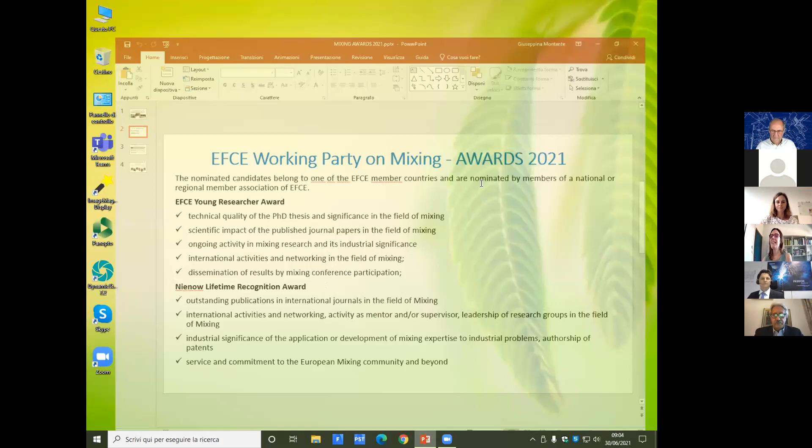As you have seen in the program today, we are presenting the two awards of mixing of our working party, the Young Researcher Award and the Lifetime Recognition Award. Both awards were established in the year 2000 to give recognition for outstanding contribution to mixing research and industrial contribution, both to young researchers at the early stage of their career and senior researchers throughout their career.

We are used to celebrating this event at the gala dinner of the European Mixing Conferences. Today I would like to thank Joelle for organizing this online event, which gives us the opportunity to celebrate with the winners and listen to their presentations. I'm sure that in two years' time we will be able to meet and to add their presence in the pictures that we usually take during the event in person.

Let's take just a few minutes to introduce the criteria that the committee usually considers for selecting the winners among the nominated candidates, who belong to one of the EFCE member countries, as well as the nominators.

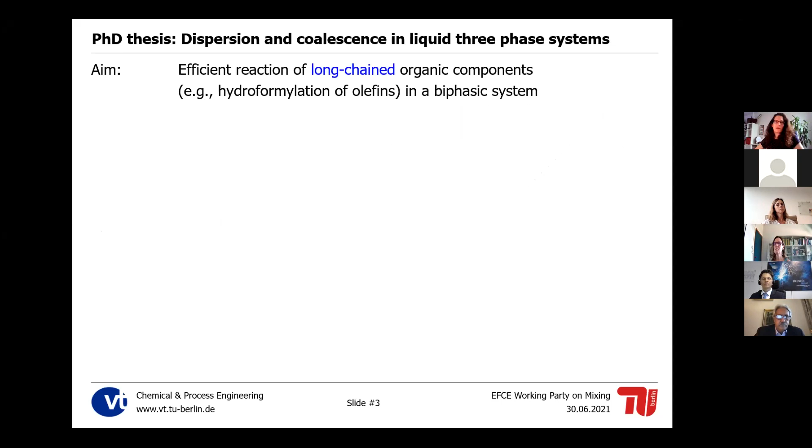The general aim of the whole project was to enable an efficient reaction of long-chained organic components in a biphasic system, for example the hydroformylation of olefins, though other reactions are possible. This should be performed in a continuous process with a reactor and a separator. We want a high interfacial area between the phases in the reactor, then we want to reduce this interfacial area to recycle the second phase, which in our case was water.

This phase also contained the catalyst and the additives in our system, and in the end we hopefully get a very pure organic product phase. So the challenge, which is not really new but also occurred in this context, is the optimization of the reaction and the separation step, so the overall process can work.

One of our solutions was to use non-ionic surfactants as an additive. If you put 8 to 10% of surfactant into your system, you will definitely get a high interfacial area, since you stabilize the emulsions and get smaller droplet sizes. So in the reactor that works perfectly, but it leads to problems with the phase separation.

This means we had to deal with the second process step here. What we did is use the system-specific phase behavior of these water-oil-surfactant systems, because it severely affects the coalescence in these systems.

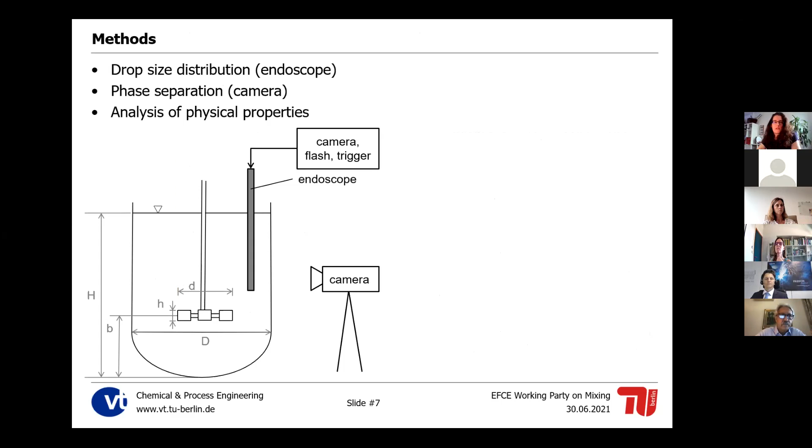The methods I used are, at first look, quite simple. We have a stirred tank, just a batch, and we can analyze the droplet sizes with an endoscope in situ. This is shown here for a very simple oil and water emulsion, a common two-phase system. We use an external camera to determine the phase separation process over time, getting information about the sedimentation and coalescence curve, and also about the dense packed zones that occur. We also analyzed the physical properties, which was actually a lot of work, especially under three-phase conditions, because there were many things we needed to learn just to get the measurements right.

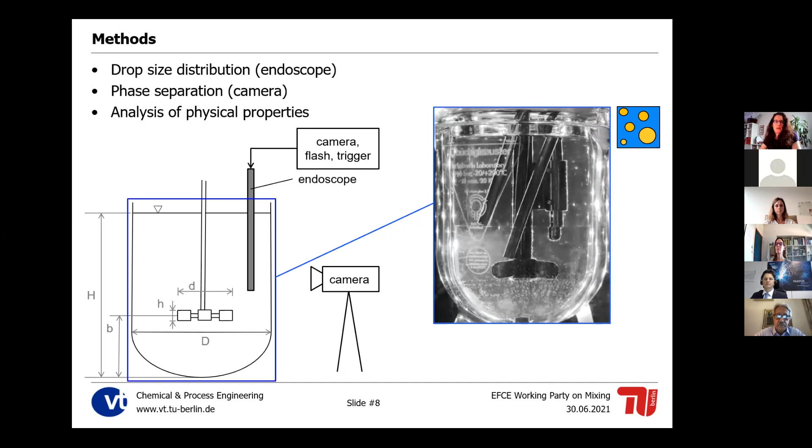When you go from a two-phase to a three-phase system, several things can happen that make it really interesting. Since you have three liquid phases, each of them can become the continuous phase depending on composition and process conditions. Furthermore, you can have either single droplets—actually two droplet forms and two distinct droplet populations—or you can have multiple emulsions, where one phase surrounds droplets of the other phase, which changes the droplet size and the phase separation behavior.

A lot of these effects are quite similar in a way to two-phase systems, but there are many details you need to understand to know what's going on in three-phase systems. Of course, I can't explain them in detail today.

The basic questions we tackled were: when does which emulsion type occur, and why? This was one of the major questions we answered. We also looked at how this affects the drop size distribution, how it affects phase separation, and whether there are ways to predict what will happen, either qualitatively or with models such as population balance equations or phase separation models.

The first question, when does which emulsion occur and why, involves a very complex interplay between the different interfacial tensions in the system, their ratio, the temperature, the solubilities, and the overall process conditions. But we managed to get a very good understanding, and we can now predict well what will happen under which conditions.

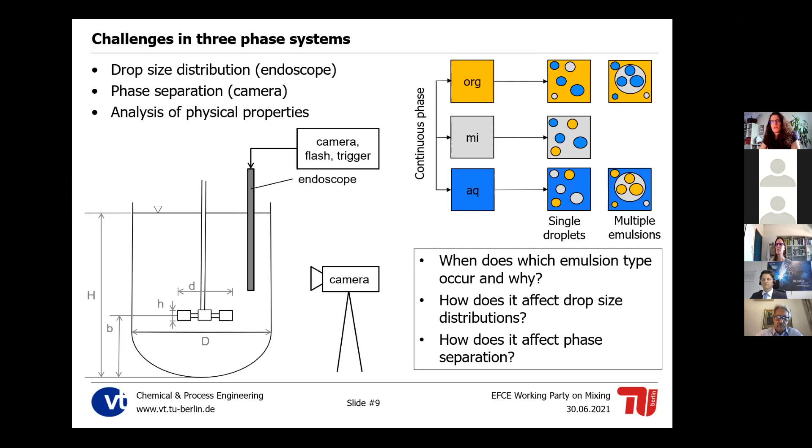I showed today some exemplary results from a model system we used, with a very short surfactant, which was easy to measure in comparison. You can see images of this system here. This is one of the cases where we had a multiple emulsion in an organic continuous phase.

From these images we can either analyze the overall drop size distribution by counting all the droplets we see—shown as the red line—or we can distinguish between, for example, the outer droplets, which are the middle phase droplets, and the inner droplets, which are the aqueous phase. So we get information either about the whole system or about the two distinct droplet populations.

If we change the process parameters a little, it can also happen that we get something like this: an inversion, with a different type of multiple emulsion, but here in an aqueous system. You can also distinguish between the two phases because they have a very different appearance—the inner droplets are quite clear and dark, while the outer droplets are a bit more turbid. You can imagine that the phase separation behavior in these two systems will be very different.

For example, shown schematically here, such an emulsion in the upper example will separate like this. We have very large multiple emulsion droplets compared to all the residual single droplets, which also occur in this system. That means the gray interface, the middle phase, will form quite fast, and the former inner droplets will be expelled into this completely coalesced middle phase. So we get a dense packed zone, and in the end several dense packed zones which overlap. If we change the emulsion type, this behavior will change a lot.

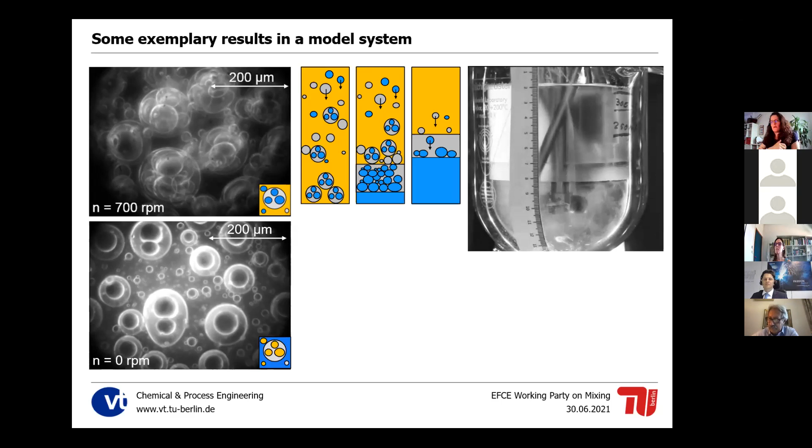What we actually got, and which is one of the main accomplishments I would say, is that these phase separation experiments can be used as key experiments for the whole process development.

This phase separation experiment can be performed in any lab. If you have a double-walled glass beaker, maybe a thermostat, and the specific components, you can just try how the phase separation looks. And with a little bit of knowledge, you can use this experiment to determine the initial type of dispersion that you had.

For that you don't even need the endoscope or the physical properties of the system, because the phase separation will show you what kind of dispersion you had, since it will change the direction and how the phases develop.

If you compare different phase separation experiments, you can also get an idea about the drop sizes, whether they get smaller or larger, and you can even distinguish if there are multiple emulsions in your system or just single droplet populations.

That was one of the things we could use for process development, because you can also perform these experiments in a more complex system, for example with catalysts and also with some educts or side products in it, and they will give you the same information.

During that time, there were already a lot of questions that I started to have which I was not able to answer in my PhD thesis, and some of them I will show here.

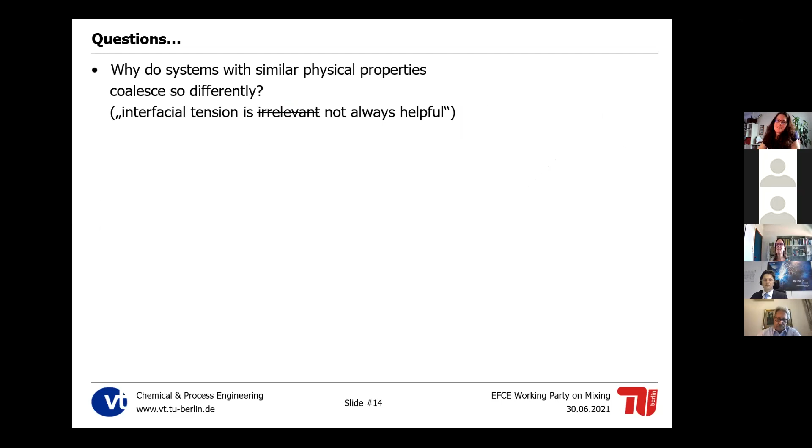One was: why do systems with quite similar properties coalesce so differently? A colleague of mine at another conference recently said that the interfacial tension is irrelevant. He was also working with three-phase systems, and I tended to agree, although I would say maybe the interfacial tension is not always as helpful as you might think. It's not irrelevant, but usually it just doesn't help you a lot.

There are a lot of additional parameters that we need to describe the interface, and therefore the coalescence behavior, such as the mobility of the interface, the rigidity - its resistance against deformation - and the zeta potential. There are a lot of studies trying to investigate this in more detail.

Another thing I started to question is how many experiments are actually reasonable. During my work we also evaluated how population balance equations can be used to predict the drop sizes and the phase separation models. They work in a small process window, and it's very interesting to work with these. But there are sometimes so many experiments that you need to do that, if you know you have a key experiment which basically gives you the result of the phase separation, it puts into question whether you would really do that on a realistic level.

I think this is a question that is also very important in less complex systems, for example in simple two-phase systems with additives that I want to investigate in the future.

Of course we also analyzed the accuracy of these modeling approaches under less complicated conditions than the three-phase systems. I think all of you will know there are a lot of things still to do, and specific models are always good at predicting something, but if you change the wrong parameter they might not give such good results. So this is another question I would like to investigate further in the future.

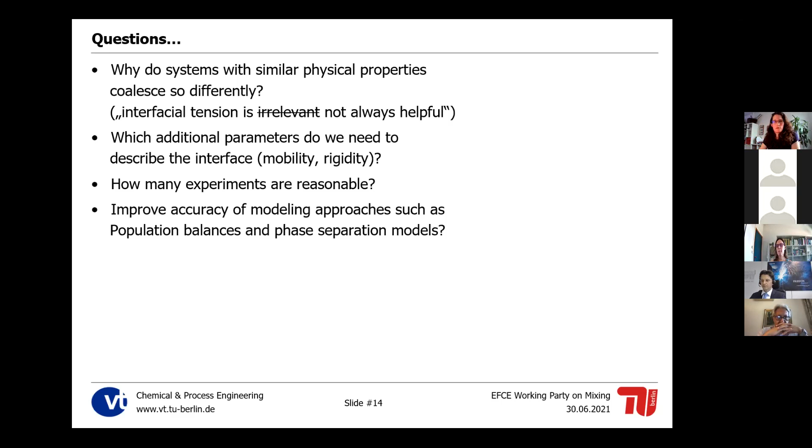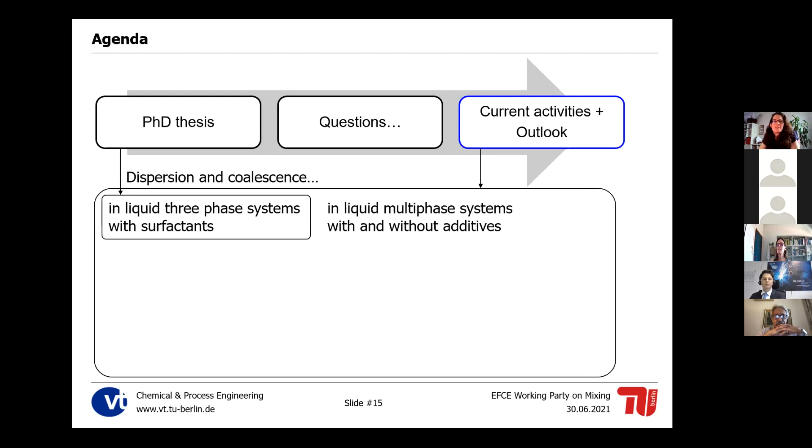This leads me to my current activities, staying in this dispersion and coalescence and stir tank topic, but expanding it to liquid multiphase systems with and without additives. These are basically two-phase systems in many cases, and at our department we have very different measurement techniques, mostly optical, which we use to analyze droplet forms, single particles, and interfaces. I'd like to use this reduction of complexity for model elaboration in the future in very different substance systems.

My current working group consists of a few PhD students and of course a lot of bachelor and master students, and we work on liquid two-phase systems, mainly without additives, with surfactants, with nanoparticles, and with proteins or enzymes as additives. Today I'd like to briefly talk about the nanoparticles, because there are some nice similarities but also differences to the surfactants I presented before.

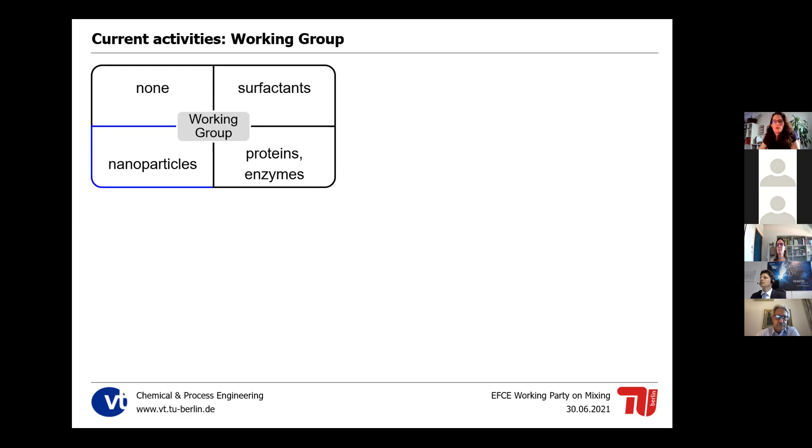Nanoparticles can also go to the liquid-liquid interface and stabilize emulsions against coalescence. But they don't do so by reducing the interfacial tension, which usually stays constant or nearly constant; instead they form a mechanical barrier that prevents deformation of the droplets and thereby coalescence. Nanoparticles also come in very different sizes and shapes and with different surface modifications, making them very interesting additives at interfaces.

If we add nanoparticles to our systems, for example up to 1 weight percent in relation to the dispersed phase, we see a huge impact on the coalescence behavior—coalescence is inhibited by the presence of nanoparticles. One of the current projects is to use population balance equations, such as the model by Coulaloglou and Tavlarides that many of you will know, and to modify it to account for the presence of nanoparticles in these systems.

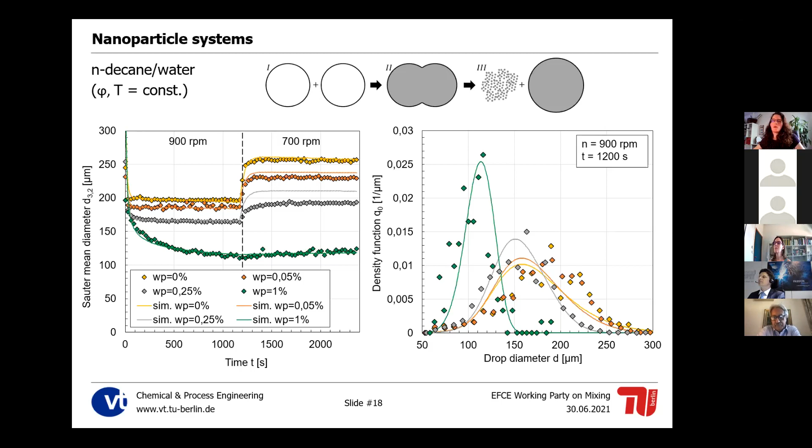That was just one basic idea, and we modified the Coulaloglou and Tavlarides model; the results are shown as the lines in the diagram, giving a quite good description, not perfect yet, of both the Sauter mean diameters in steady state and the step experiments. Importantly, we try not only to fit the Sauter mean diameters but also the whole distribution of the system. The experimental distributions and modeling results are shown here, and although the experiments scatter a bit, we get a good description of how the distribution width broadens and shifts toward larger diameters—quite promising.

Of course there are a lot of things we can still improve. For example, apart from the coverage, we also want to introduce a physical parameter of interfacial rigidity. This means measuring the dilatational viscoelasticity of the interface in the tensiometer as a function of the coverage or particle mass fraction. This can give information about multi-layers that occur and can maybe in the future be introduced into the model to optimize it further.

And of course we have a hundred other ideas—for example, nanoparticles change the viscosity of the phase they're in, making it shear thinning, sometimes even viscoelastic. So there are a lot of things we're currently working on. For everyone interested in details, I'll also be at the ECCE conference in September, where we'll present a bit more about the model we developed here.

So with that, I would come to a brief outlook. I already showed you what I'm planning to do during the next years in my research. And I also started what I call a little side project. Little side projects can sometimes take a lot of time too.

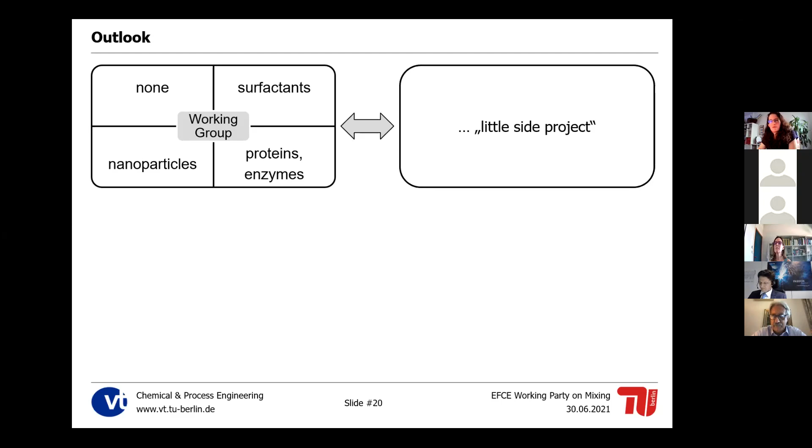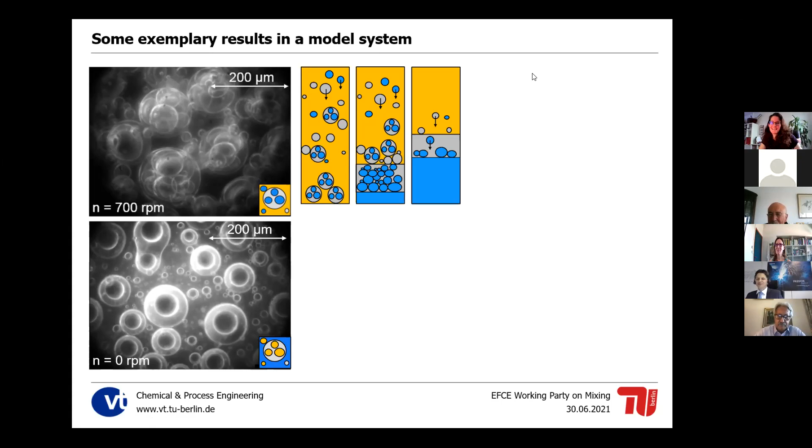Lena, thank you, it was really a pleasure having this talk, and I could imagine with all the questions we could talk for hours. We need to watch the timing, and thank you again for this wonderful talk.

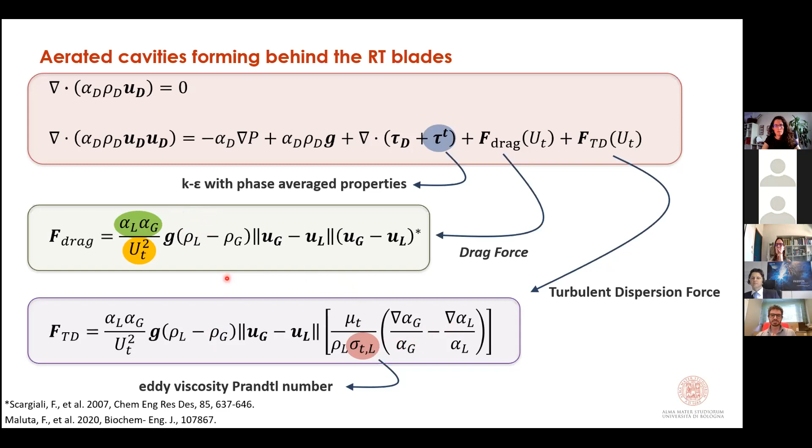We studied the interaction of the interface forces, and we concluded that both the continuous and the dispersed volume fractions must be included in the formulation of the forces, and actually their balance allows the formation of aerated cavities behind the blades of the impeller.

As we were saying, the interface forces depend only on the bubble terminal velocity, and the Grace model was adopted since it can describe the motion of spherical and ellipsoidal bubbles. A single terminal velocity was adopted, meaning that a monodistributed bubble size was assumed.

Assuming a single bubble diameter, of course, is not the only viable approach. Many research groups successfully adopted the population balance to get the bubble size distribution, in fact. So we adopted a single bubble diameter to cut down computational costs, allowing the adoption of the proposed model to industrial size fermenters.

Moreover, we have to say that few studies address coupling between CFD and population balance equation in stirred tanks at high gas flow rates, and especially, let me stress this, when segregation occurs, so when we have the cavities.

Okay, the first set of results that I'm showing concerns the prediction of aerated cavities behind the impeller blades. On the left side here, you can see the results of the tank operating in the conditions shown at the top of the slide.

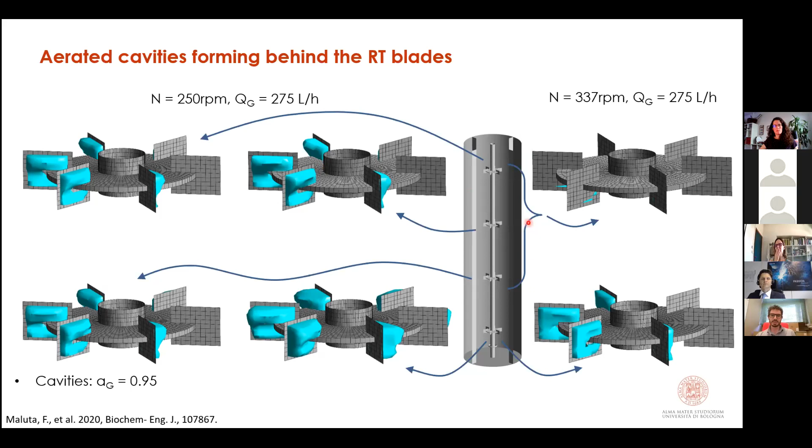Once we managed to predict the aerated cavities, we used the single impeller stirred tank to quantitatively validate the results. Adopting the correlations developed by the group of John Smith, we identified 4 conditions in which vortex clinging and small 3-3 cavities were expected. As you can see here from the pictures, in cases 1 and 2, the clinging cavities are predicted, as expected from the correlation.

The color map indicates the gas volume fraction, and once again, only the cells with a gas volume fraction higher than 0.95 are displayed here. The other 2 cases, case 3 and 4, show the small 3-3 cavities, and it is evident there is an alternating pattern between clinging and large cavities.

Afterwards, we compared the area of the cavities as obtained from the simulations and from experimental data previously collected in our research group. To determine the gas-liquid interface, 2 thresholds were adopted: the lowest corresponding to a gas volume fraction of 0.95 and the highest being 0.99. The numerical results are in very good agreement with the experiment.

The correct prediction of the aerated cavity size and shape is important since the power drawn by the impeller decreases as the accumulation of gas behind the blades increases.

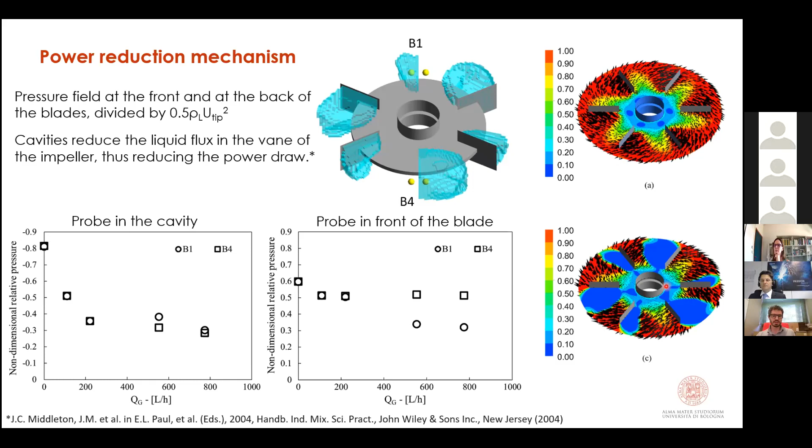In particular, gas is almost homogeneously dispersed in a complete recirculation regime. In the loading regime, the gas phase is distributed mostly above the plane of the impeller, and in the flooding regime, it is evident that the impeller fails in distributing the lighter phase, which travels almost undisturbed from the sparger to the upper surface.

The mean age theory developed by Liu and Tilton was extended to 2-phase systems, and the analysis was performed in the 4 different flow regimes presented before.

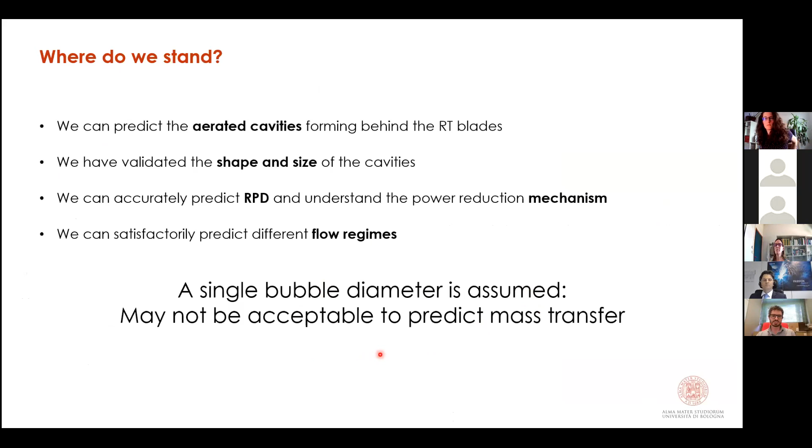The results I've just presented are obtained with a single bubble diameter. With this simplified approach, we managed to predict many features of aerated stirred tanks, but the main drawback is that it may not be acceptable to predict the interface mass transfer, and in particular the specific interfacial area. In fact, in stirred tanks, the interface mass flux is commonly modeled with this expression, where N is the molar flux.

According to the widely used Eddy-Cell model by Lamont and Scott, this expression is used to model the liquid side mass transfer coefficient. KL depends on the local turbulent dissipation rate, and therefore we can predict it since we've seen that the average epsilon field produces power numbers close to the experimental values.

The next term to model to obtain the interface mass flux is the specific interfacial area. So far, in the context of the 2-fluid model, we used a simplified expression to obtain it at a high gas volume fraction and where there is segregation of the 2 phases.

A more realistic strategy would require modeling the bubble size distribution with a population balance approach, as already done by other research groups for dispersed gas liquid systems. We are currently investigating this path, and in a few slides I'll show some of the open issues we are facing. The last term to model to obtain the interface mass flux is the driving force of the process.

Once the turbulent 2-phase flow field is satisfactorily predicted, the species distribution inside each phase is governed by a scalar transport equation. One way to validate the transport dynamics is to compare the numerical and experimental mixing times following the injection of a tracer, and such experiments are currently underway in our labs.

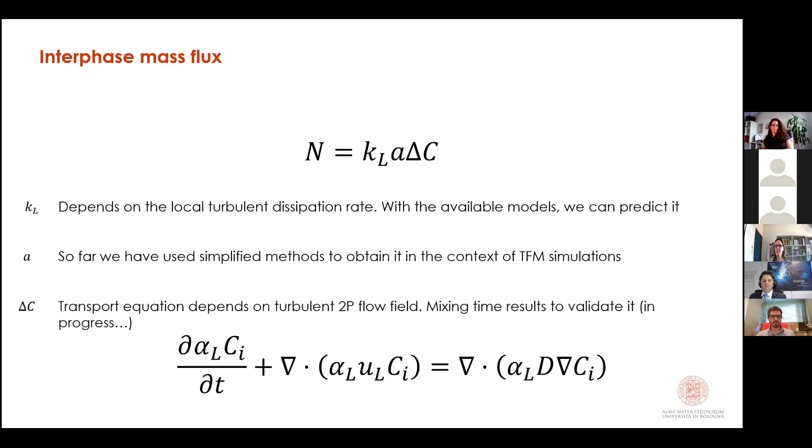In the last 5 minutes of my presentation, I'm going to show the modeling and numerical challenges that we are facing right now.

We are struggling in obtaining a realistic prediction of the specific interfacial area with a population balance approach in aerated stirred tanks with a high gas holdup. The first critical choice concerns the selection of the appropriate breakup and coalescence kernels. To address this point, we use the same kernels proposed by our colleagues at the Politecnico in Torino in the simulation of a similar system.

Concerning the accurate description of the flow field in the impeller zone, one of the main challenges is the modeling of the turbulence where segregation of the two phases takes place. Adopting a RANS approach, a simplified description of the turbulence entails determining the turbulent variables, adopting either mass average properties, the properties of just the continuous phase, or describing the turbulence in each of the two phases.

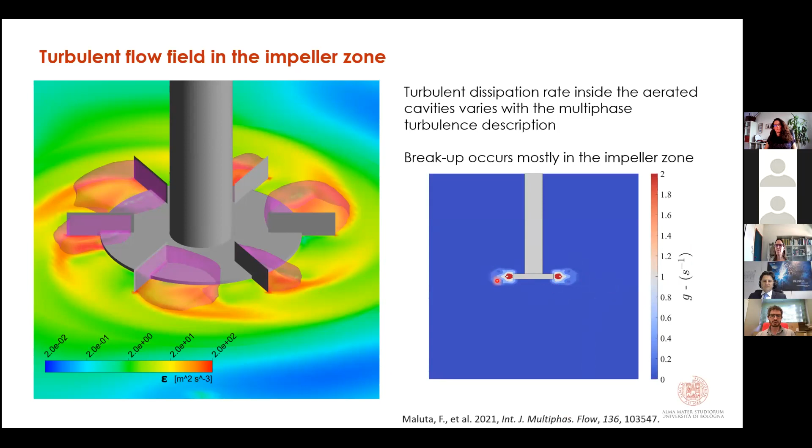Another challenge is the accurate description of the impeller zone from an experimental point of view. In fact, accessing the zone is often very difficult, and even the correlations developed by Alves to obtain the average diameter in the impeller actually measure the bubble size at some distance from the impeller zone. At high gas volume fraction, breakup and coalescence may change the bubble size distribution, making the collected data not fully representative of the bubble distribution in the impeller zone.

The last aspect I'm showing concerns the spatial discretization of the impeller zone. These two contour maps show the gas volume fraction distribution on a horizontal plane passing through the center of the impeller. Two identical meshes were adopted, the only difference being the number of cells in the volume swept by the impeller. The results on the left, obtained with a finer impeller discretization, better agree with results obtained with a much finer grid.

It's worth observing that the largest differences between these two contour maps are observable in the bulk of the tank, where the spatial discretization is actually identical. This means that the description of the impeller zone has a large effect on the whole domain, not just in the close proximity of the turbine.

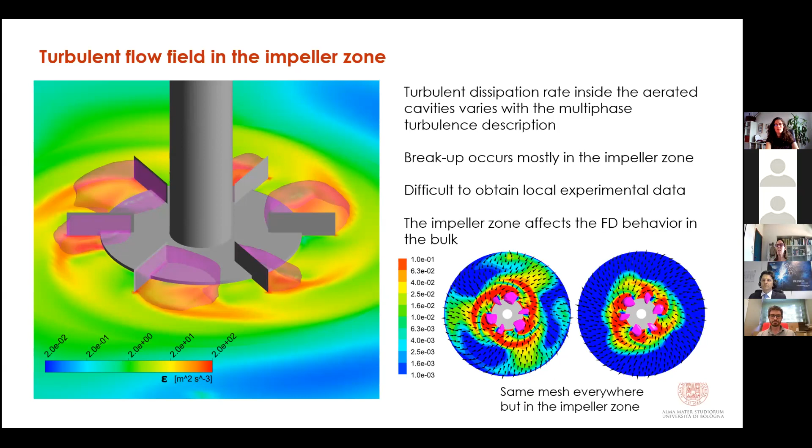Another aspect that deserves attention is the choice of the bubble diameter exiting the air sparger. Different correlations exist in the literature, and while the diameter of the bubbles exiting the sparger weakly affects the Sauter mean diameter in the bulk of the tank, it has a large impact on the predicted Sauter mean diameter in the impeller zone.

The last issue I'm showing today is related to numerical problems in the impeller zone. Since we are pushing the limits of the Euler-Euler model, we observed that when segregation between the phases occurs, the typically adopted steady-state solver diverged. We managed to get robust and reliable results by adopting a pseudo-transient solver, which is still a steady-state solver but adopts implicit relaxation of the equations. Nonetheless, the pseudo time step must be lower when the segregation starts.

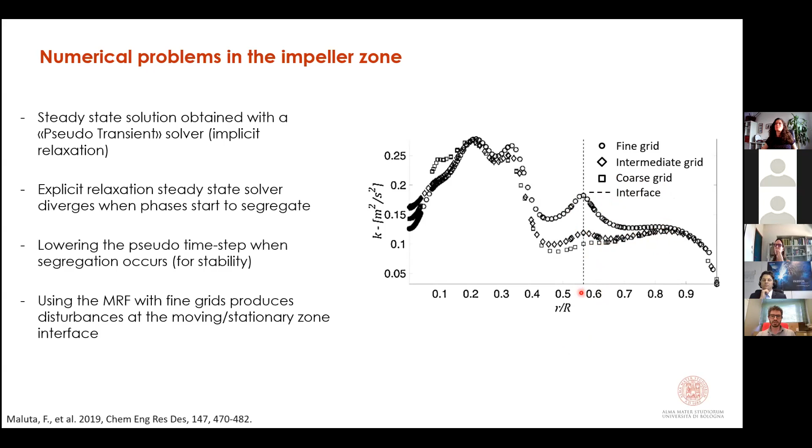To sum up, with this presentation I've shown that we can predict the flow field of aerated stirred fermenters in a wide range of operative conditions. We validated the formulation of cavity shape and size, power consumption, and the flow fields in stirred tanks operated with Rushton turbines. We will extend the study to other types of impellers and tank scales, and several modeling and numerical aspects need to be addressed to accurately predict the turbulent flow field and the bubble size distribution in the impeller zone, allowing for realistic prediction of interfacial mass transfer.

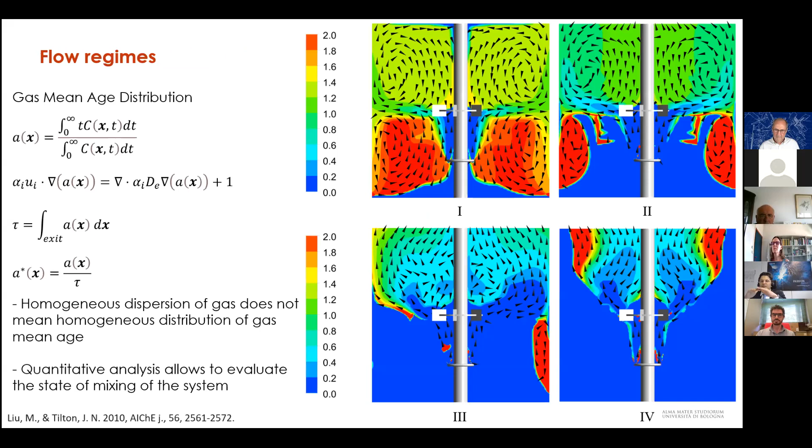Okay, there are quite some additional questions. If you look at the Rushton turbine itself, at the geometry, there is quite some turbulence coming from the blade itself, as the fluid is streaming out of the horizontal blade. Here are some questions in terms of cavities.

Stuart Stokes, I will just read it: Prediction is quite good, but the visuals imply you do not simulate perfectly the experimental system. Did you simplify hub geometry, blade or disc thickness, real vessel, disc shape, and so on? Could it be the prediction would be even better if these details are included?

Okay, so concerning the simplifications, we treated the baffles and the blades of the turbines as surfaces without any thickness. So yeah, this is correct.

Concerning the effect on the results, I'm not so sure of that. In a single phase and dispersed regime, we've seen that this has very little impact on the results. Maybe we can investigate that, but I would say this is not a priority at the moment, and there are still other open issues that are way bigger than that, but we don't expect a very big difference by adopting a real blade.

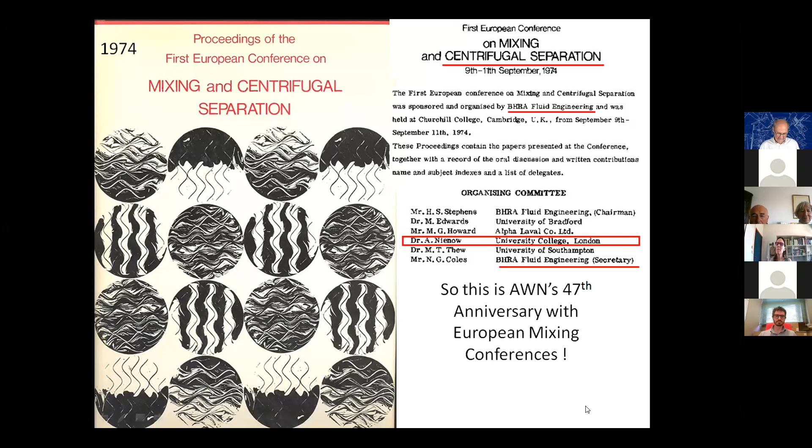I thought it'd be interesting to go back a little about European mixing conferences, because there are some rather strange features in the background. The first conference was called Mixing and Centrifugal Separation. It was a financial venture run by BHR Group in the days when they started running mixing conferences, but it was largely, like all the conferences at that time, a financial venture. I was on the committee, but it was driven by Nick Coles, who was a bit of an entrepreneur, but certainly not an engineer or scientist. I think he felt that since impellers rotated, centrifuges rotated, and fluid in cyclones rotated, the two went together, which of course they don't. But that was the first conference, and as you can see, I've been involved now for approximately 47 years.

There was then a brief period where a critical point is that our working party was founded at a conference in Mons, Belgium, run by Professor Bruxelmane, mixing in the chemical industry. At this conference, the lead BHR group organizer stated that the conferences were now losing money and wouldn't run anymore. Because the working party had been founded, Ivan Fořt had been invited along as secretary, and from that point on it moved away from BHR Group to the working party itself.

But the BHR Group continued to publish the proceedings, and they made a very nice job of it. So the first time it really became totally integrated into the European system was in 1988 in Pavia, the 381st event of the European Federation of Chemical Engineering. It was chaired by Giancarlo Baldi and Franco Magelli, and there are a number of familiar names there who also became awardees.

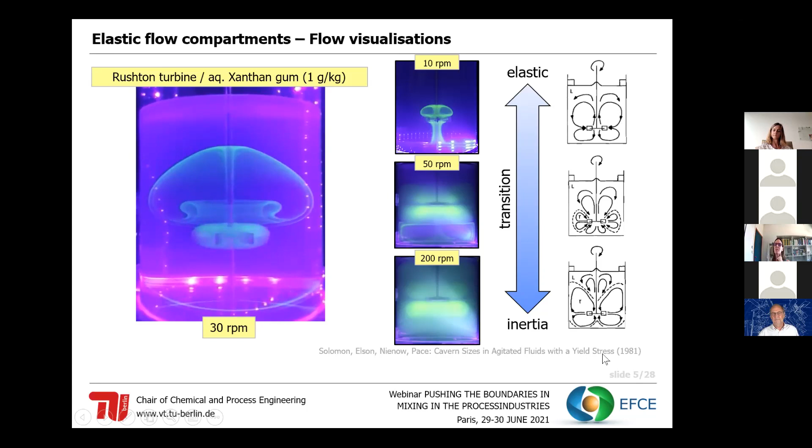Maybe this is the opportunity for me to give a small remark to all younger colleagues in mixing: wherever you go, you will probably find out Alvin has been there. So you see here in the list, Alvin has been among us, 40 years ago. Nevertheless, the liquid has been a little bit different.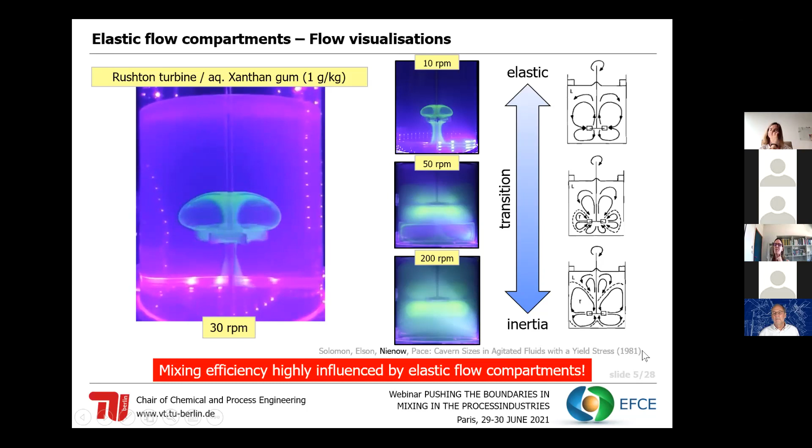Anyway, the mixing efficiency is of course highly influenced by the elastic flow compartments, or by the flow pattern in total.

Now we in chemical engineering would like to have dimensionless numbers, and these dimensionless numbers, first fluid dynamic means always Reynolds number. Reynolds number is of course a little bit difficult here - we have to take the shear rate into account, but that's possible.

We also have the Weissenberg number, where the first normal stress difference is related to the shear forces - so it's elastic forces over viscous forces. And we also find an elasticity number, where we have once again the first normal stress difference over the inertial forces. We will find that number later on in further descriptions.

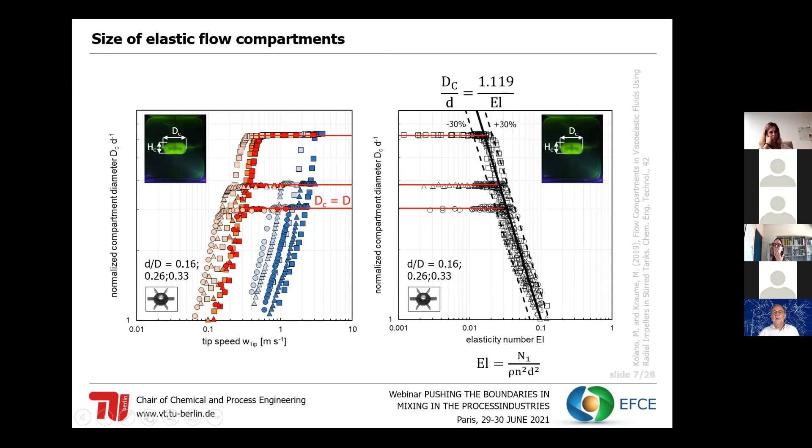If we instead use the elasticity number as defined before with the same description, we find that all these data collapse fairly well on a straight line, which gives us an idea that the elasticity number is a reasonable number, at least for describing the size of those compartments.

Now let's go more into detail, because that was more qualitative. Let's have a look at the velocity fields that occur. We did some investigations here by using a laser light sheet and adding various additives, various tracers, just to do LIF or PIV measurements.

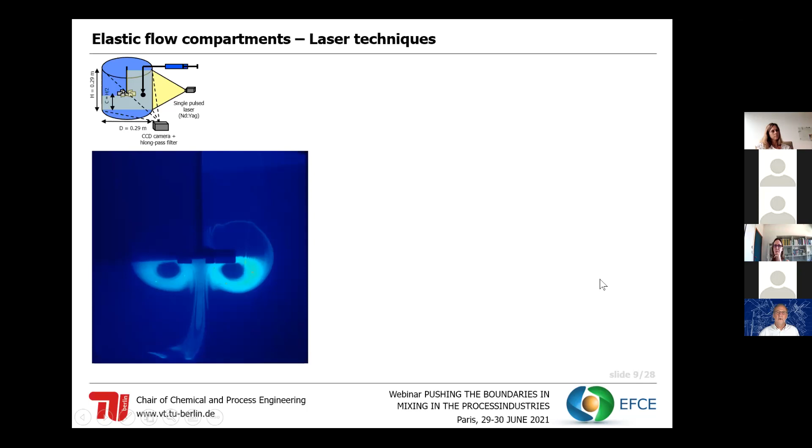This video shows you the development that occurs when we introduce tracers, and you see the clear development of this kind of compartment. But we see on the other hand that there is a flow downwards, which is a bit confusing, because flow downwards from a Rushton turbine is something we normally do not see - it normally goes upwards, not downwards. Once again, a typical effect of our viscoelasticity.

Let's go further downwards. Here we have a low viscous medium, still viscoelastic. We see once again the typical elasticity-driven vortex, but with increasing stirrer speed, we see behavior that reminds us much more of the flow field we know from the Rushton turbine.

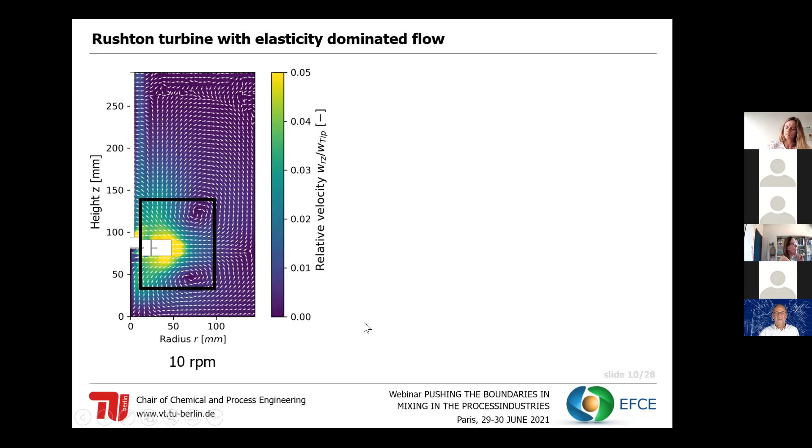But if we have a closer look - meaning the vicinity of the stirrer - and do an angular resolved analysis, we see something completely different. The average gives us an average, but reality, when it goes to details, looks different. What we find are Rushton turbines, so we analyze degrees between 0 and 60 degrees because we have 6 blades. The flow close to the blades changes significantly from time to time - we have an inward flow, but also an outward flow. These images really show how complicated it can be to describe these effects of viscoelastic fluids.

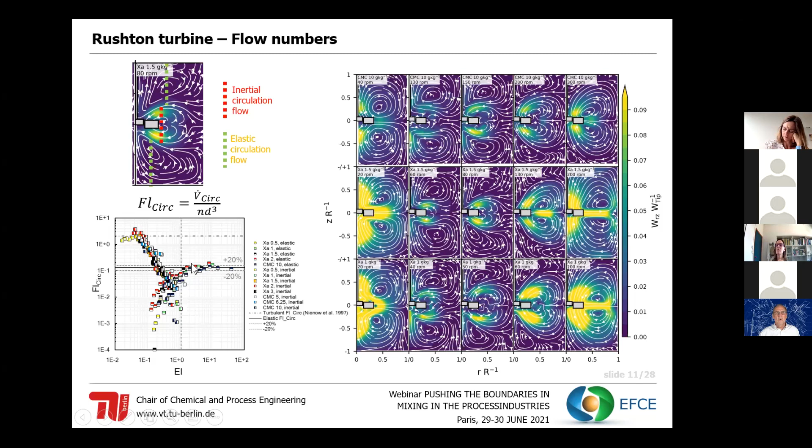Let's go more to the engineering data. Engineering data is, for instance, a flow number. The flow number can be determined for either the range where we have basically inertial-driven circulation or where we have elasticity-driven circulation. If we do so, we end up with a diagram: this is the flow number over the elasticity number. For all these various results, we are able to distinguish various areas. For high elasticity numbers, where elasticity is dominant, we end up with a more or less constant value, much smaller than for the range where inertial forces are dominant. So we are able to distinguish three different regimes.

And once again, I'd like to come back to my previous comment: this line is the flow number known from Newtonian liquid. And if you look very closely at this small written name, once again, Nienow was there.

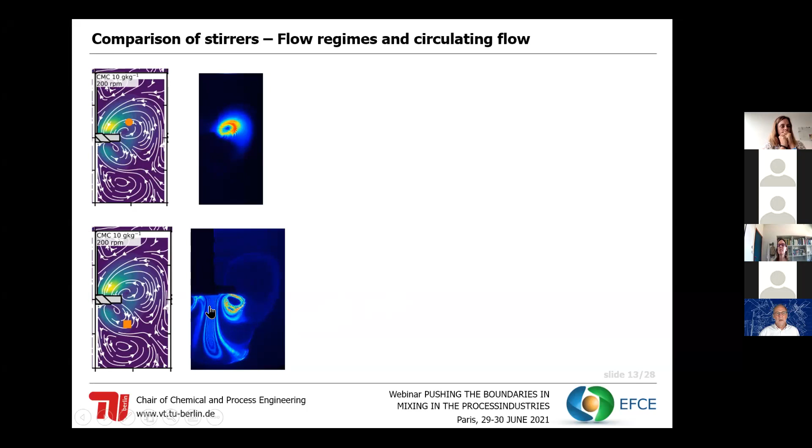We didn't only look at Rushton turbines, we also looked at other types of stirrers. Here I'll show you the flow fields from LIF measurements, where we introduced tracers in this vortex, and also looked at the vortex below this pitch blade turbine. These vortices can be very clearly seen - they are limited, but not closely limited. This is not a closed system as in thermodynamics, but an open flow going downwards, once again driven by elasticity. If we do the same analysis as before - flow number over elasticity number - we see for other types of stirrers the same behavior: high elasticity number gives a very low flow number, while low elasticity number means inertial forces are dominant and we get a higher number.

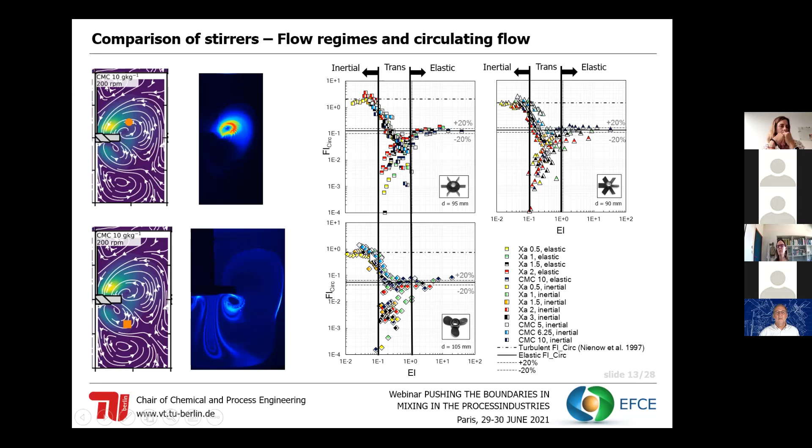So you may ask the question: why in the world do they operate these small stirrers with viscoelastic fluids? We will use other stirrers, and therefore this is an analysis.

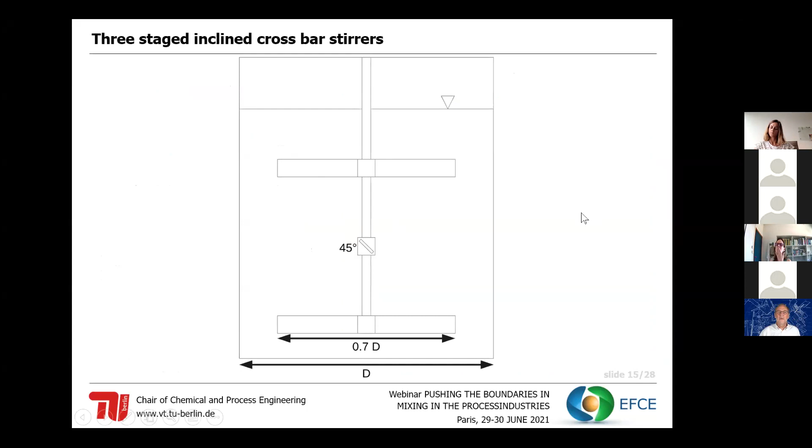Next point, this is a very simple type of stirrer, the crossbar stirrer here, with 3 inclined blades. We did some measurements on that. Looking at the results, we find a circulation loop of this kind, but close to the blades, nearly nothing really happens. We have here the color bar to indicate the relative velocity, which is the velocity over tip speed.

Once again, having a look at angle resolved measurements, the picture changes a lot. We see that the flow field changes, and we see a lot of fluctuations. Especially when we talk about CFD, which we did in the presentation of Francesco, we have to have this kind of results for validation.

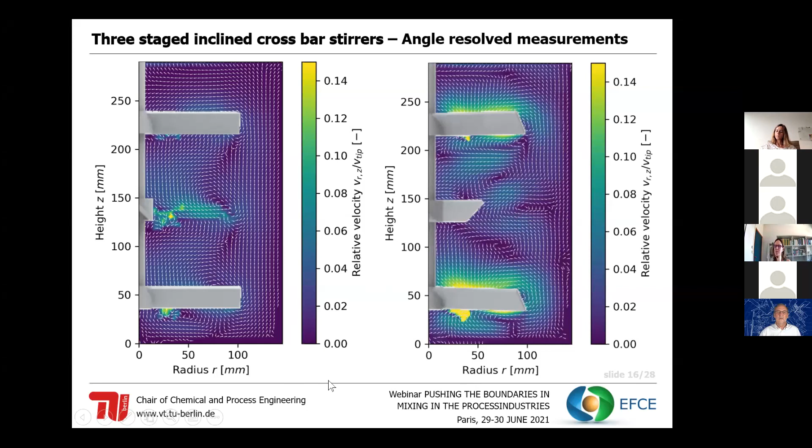And we did that not only for this type of cross section, but we also have the circular cross section of the tank as well, just to have enough data, because we also want to do CFD simulation, and we did. In that case, viscoelastic properties are a wide range, really wide range.

So we tried to use 2 models, Giesekus and Phan-Thien-Tanner, and we had some measurements and we had to determine some parameters, which we did. And then we set up a viscoelastic CFD using an in-house solver based on OpenFOAM, a viscoelastic flow solver, and a sliding mesh.

And what came out are images like this. Once again, a lot of images. I just wanted to highlight that we are able to determine here various stirrer speeds increasing from top to down. We see here the measured data, our elastic vortices, which are represented fairly well by both of the models.

In the case here, where we have a first inertial driven vortex, you see that one model, the Giesekus model, is not that appropriate here. PTT is better, but when it comes to higher velocities, both models do lead to reasonable results.

I just want to highlight that with a bunch of other data, but not to go much into details. Here we have the radial velocities, once again for various stirrer speeds, and at certain distances from the stirrer. This is only to demonstrate that we are able, using this kind of simulation, to end up with reasonable data for this radial velocity.

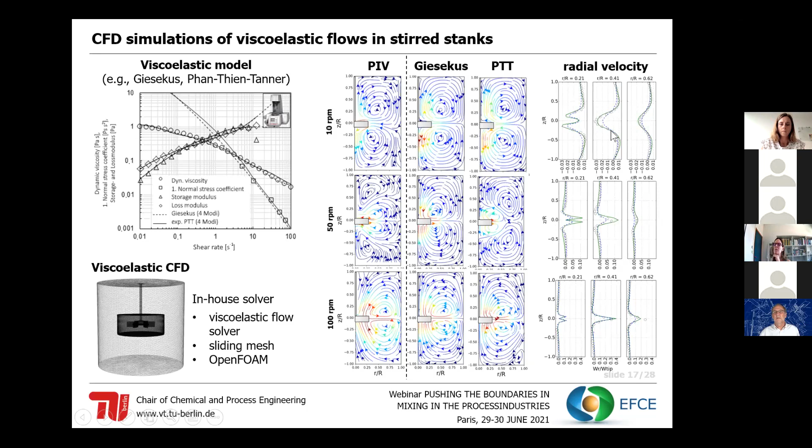Last point on my presentation is something which might be a little bit weird: side entry impellers. Why side entry impellers? We did some investigation on biogas plants and the mixing efficiency. When we did that, we found this typical arrangement of propellers immersed into the liquid, which reminds us of side entry impellers.

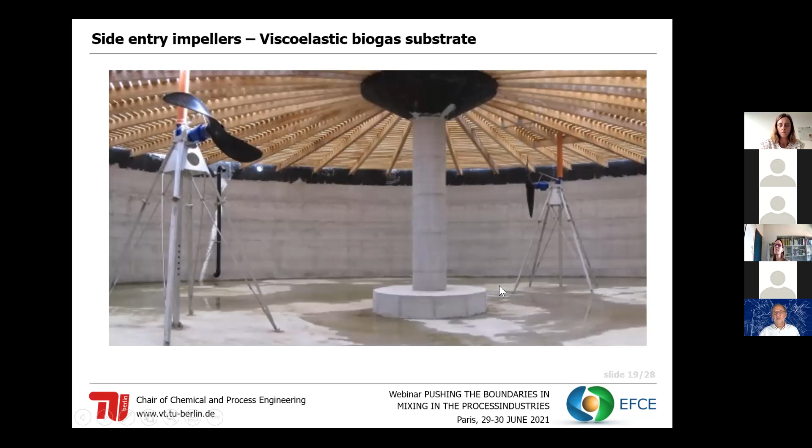Then we had a closer look at the rheological behavior of our substrates in the biogas reactors, and we found out that they are not only shear thinning, which is something we know very well, but they are also viscoelastic. Analyzing that, we have here the various moduli, the storage and the loss modulus.

Therefore we thought it's necessary to have an investigation, and we built up a setup, a basin 1 meter in length and 25 centimeters high, so that we are able to determine the flow that is introduced by such a propeller. Just to give you an idea, once again, a live image.

Starting at a very low velocity, very low stirrer speed, you see there is an axial flow, which seems to be very well. Then we increase the velocity, and now things are turning.

So the flow field shows a redirection of the flow. We see here that our flow outwards is now more radial or semi-radial. If we increase it even further, we have more or less something like turbulence.

And here, this is the outcome. We have images, the flow fields, we have various stirrer speeds, we have the same medium. At the beginning, low stirrer speed, we have axial flow, then we have radial flow with an axial flow going to the stirrer. And then if we increase the velocity even further, we once again have axial flow.

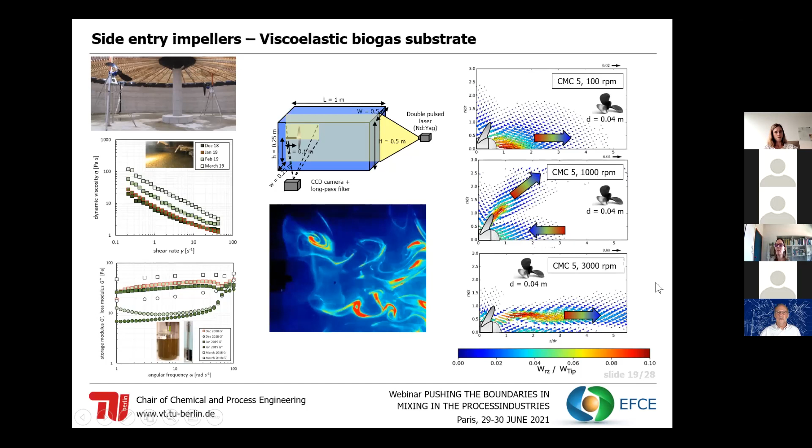We used various stirrers just to be sure that these results are really reasonable. We also did some CFD simulations, and here we find the outcome of the CFD simulations. These are PIV measurements, and this is once again an example looking at colorful pictures. Well, it's nice, it seems reasonable, but the question is, does it really fit together in terms of numbers? So quantitatively, and this is the quantitative analysis.

We are in the range where we have a semi-radial flow. What we have here are the flow fields, the radial flow field with increasing distance from the stirrer. You see it here, or it's very difficult to see. Anyway, we have here the measured data, not going into the details.

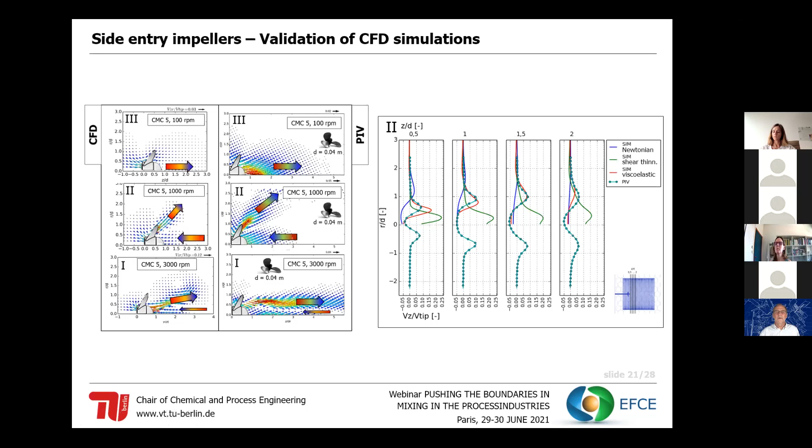We tried Newtonian and shear thinning liquids, and when we use our viscoelastic model, at least we could describe the data more or less accurately. It's not perfect, but we could describe it. The other rheological descriptions do not fit, and they do not give a reasonable answer. That is shown here.

So then, some curiosity: we did measurements and found out that we could measure these velocity fields. That's not surprising, you have already seen that. But these measurements were done for the same liquid, with the same properties, for the same stirrer, and, which is more impressive, for the same stirrer speed. And that confused us a lot, because we thought, how could this be?

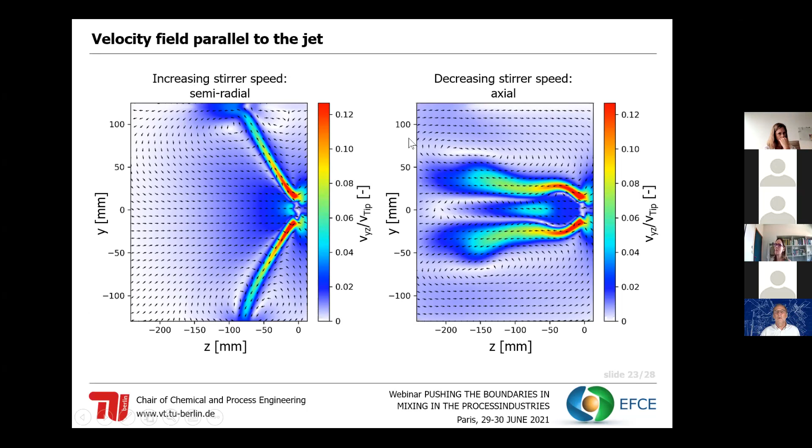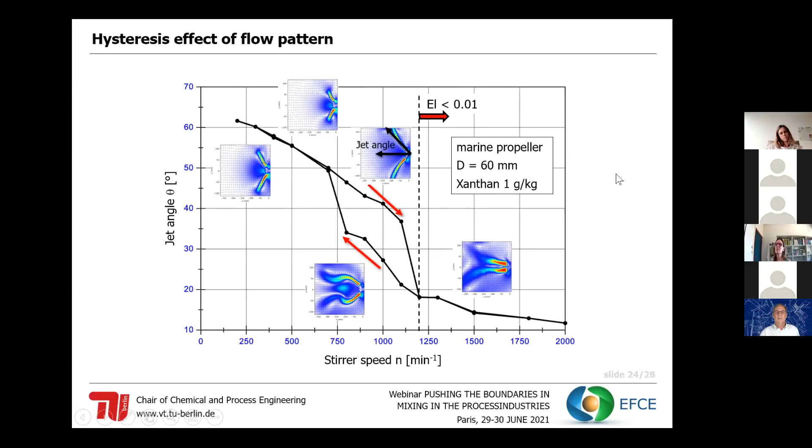Looking at the other cross section, perpendicular to the jet, we see the two conditions: the axial flow and the semi-radial flow. When you look to the details, hopefully to be seen, we see there is still a very high rotational speed here, which leads, of course, to normal stresses, whereas here there are only radial flows that can be seen. So obviously there is a distinct change in the flow pattern, which of course could be used.

And the last experimental results are here. We had a project where we thought of a biogas plant and whether we can use the measurement of the thrust acting on our propeller to have an idea of the intensity of mixing. Therefore, we did some experiments measuring this in a relatively large size tank that we built.

We found out that having here the flow rate of the impeller and using this force that was measured, dividing it by the terms as you could see here, gives us a collapse of all data, at least if we're in the inertially driven range. Here, this is the transition range where this is hardly possible. And what is now the link to mixing?

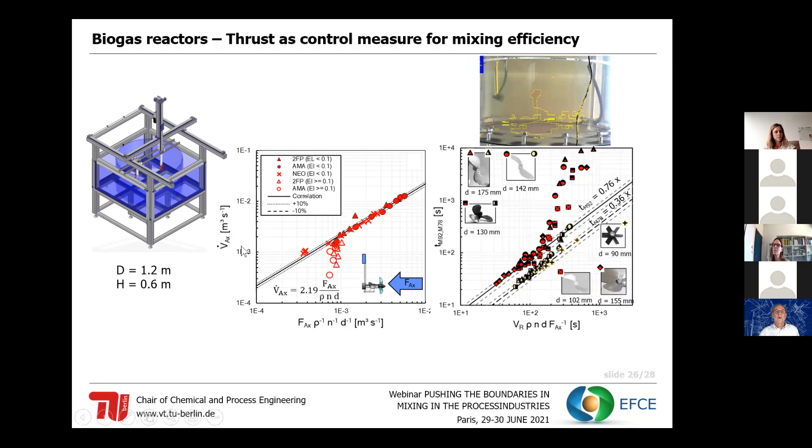And if we now use here the reactor volume divided by this term, which represents the flow rate inside the tank, then we have here something like... oh, what is that? So I will try again. Where is my image? I'm afraid I have to go back.

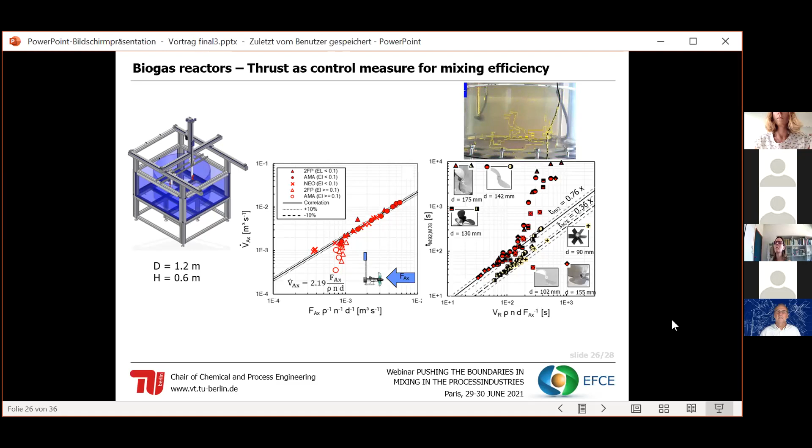So here, this is the analysis. And here we find the mixing times, and the mixing times do really relate well to this circulation time. And of course, depending on the degree of mixing, we find the lower times for the lower mixing degree and the higher times for the higher mixing degree. So that is something which really made us happy, because this is an opportunity to help operators of biogas plants to operate their plants systematically.

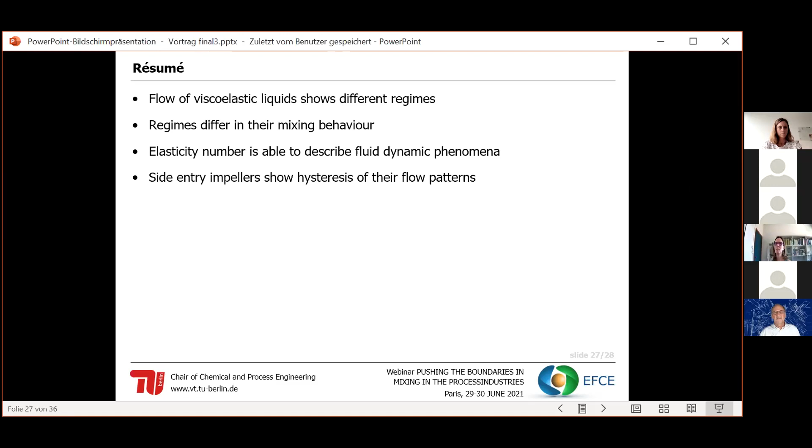By this, I would like just to resume. I hope I could show you that there are various regimes that we can find here, and the flow patterns differ in their mixing behavior and, of course, in their mixing efficiency. We have the elasticity number as a dimensionless number, helping us to describe fluid dynamic phenomena. We have side entry impellers with a hysteresis, which could be used for practical aspects as well. And we are able to even simulate the viscoelastic flow inside these tanks based on CFD.

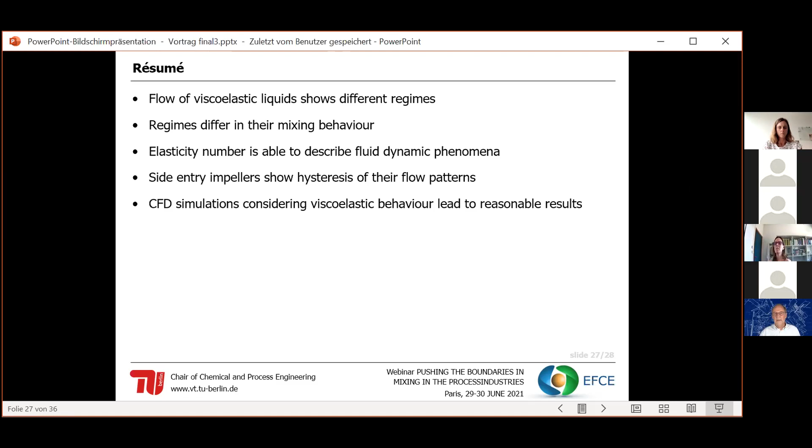So by this, I would like to thank you. But first of all, I would like to give my congratulations to my friend Alberto. And as you see, we've been already together in Toulouse, not preparing for this award today. But anyway, this is a very nice picture and a wonderful possibility to remember those days in Toulouse three years ago. Maybe the elder people do know that in the past we met each other in presence. And by this, I would like to thank all of you very much for your kind attention. Thank you so much.

So let me first of all thank the award committee of the working party, our members, and the member that advanced my nomination. Let me say how honored I am by this prize, and I already said that I'm also glad to share it with Matthias. Thanks to Alvin and Ellen, and I'm really glad that Ellen's name is explicitly made part of this, because she, no doubt, is definitely part of the mixing community, and so she deserved to be there. I want to thank Alvin and Ellen as well, and Alvin especially for these kind words on what I have tried to do along these years in mixing.

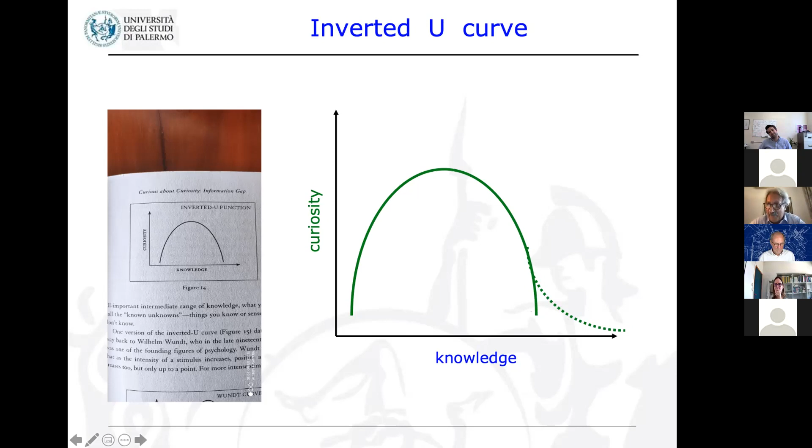And so I like to show this graph to you. Well, I must say that this is the original picture in the book. I'm not sure it goes down like this, it may go down in an exponential way, but nevertheless this is a qualitative graph, and I liked it a lot.

So going back to many years ago, I was already working on mixing issues because Italkali, a company operating a salt mine in Sicily, produced a fertilizer, potassium sulfate. In their process, one of the steps was dissolving a double salt.

Well, I don't know the English name exactly. I think it's something like skienite. I guess the German name is Schönheit or Schönite. The Italian name is Schönite anyway, but in English I don't know how to pronounce it. Let's pronounce it skienite, as the word ref suggested me.

And when you dissolve it into water, what happens is that while the dissolution continues and the concentration of skienite ions into water increases, at some point the solution gets saturated, but not towards skienite, but rather first gets saturated with respect to K2SO4.

So crystals of K2SO4, the potassium sulfate, start being produced while schoenite is dissolving. They call this step a conversion of schoenite into potassium sulfate. It's clearly a fairly complex process to model, because you have the dissolution and the crystallization coupled.

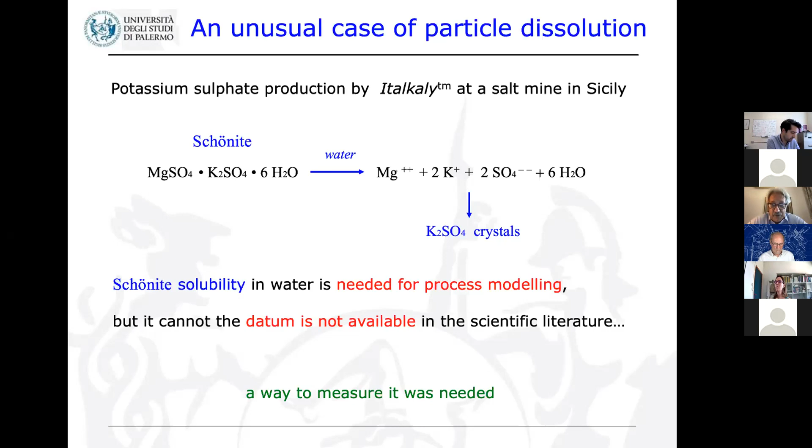Then we knew that we needed a way to measure interfacial concentration of Schönite during its dissolution. Actually, this was the quantity we really needed, not its saturation concentration. But as you know, it is usually assumed in mass transfer processes that at the interface you have equilibrium, and then the interfacial concentration should coincide with the saturation concentration. But what we really needed for modeling purposes was the interfacial concentration. So what we did is we devised a simple model.

The model assumptions are very reasonable. Probably the most difficult to accept is that Kc, the mass transfer coefficient, is independent of particle size during the dissolution. But it turned out to be a very good representation of the reality. And we were even able to get an integral analytic solution for the concentration dynamics in the system.

I must say that the model worked extremely well. It was able to represent the concentration dynamics of dissolution very well. Clearly we kept far away from saturation in this data, but we were able to actually measure the interfacial concentration, embedded into this parameter Xi, which luckily turned out to be the same in all our experiments, independently of initial particle size and independently of agitation speed. So we were confident that was the actual interfacial concentration.

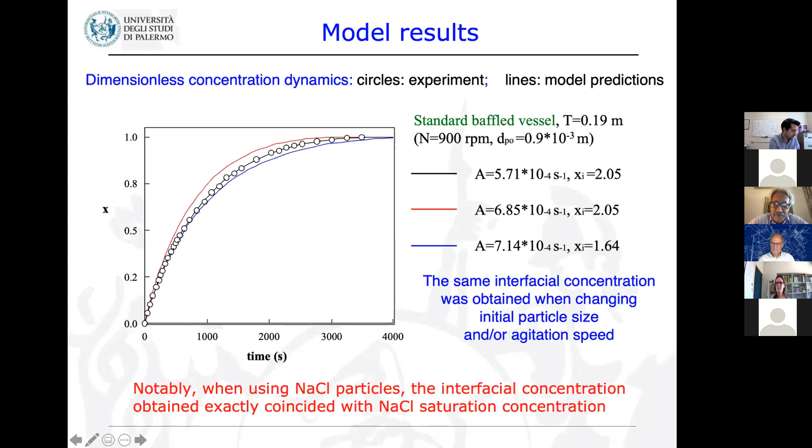Notably, we used it also to look at the dissolution of sodium chloride particles, for which the datum on the saturation concentration was available. And the measured interfacial concentration did actually coincide with the saturation concentration. By the way, this is one of the very few experiments, or very few proofs, that our common assumption of no resistance at the interface and of equilibrium at interfaces has been obtained.

So we were working in this field, and for this reason, our interest towards mixing issues and solid suspension had already started. In this realm, we came across a paper by Hohl et al., where the authors claimed that higher solid-liquid mass transfer coefficients could be obtained for the same energy input in a stirred vessel in unbaffled vessels with respect to baffled vessels. This intrigued us.

This raised our curiosity, and the explanation offered by the authors was that this was probably due to a matching between the energy dissipation map, which they expected to be stronger near vessel walls, and the particle concentration map. So the idea was: if particles stay in regions of the vessel where the average dissipation is higher, and therefore the average mass transfer coefficient is higher, then you will get a higher average mass transfer coefficient in the system. This explanation also intrigued us. Was it true?

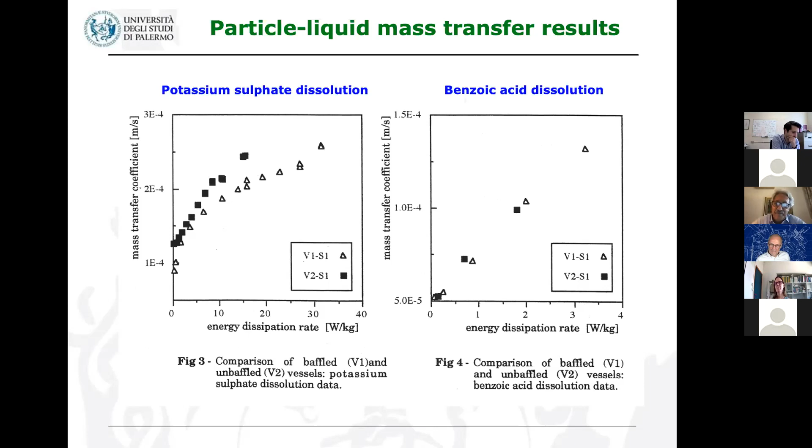At least this was the case when potassium sulfate was used as the solid phase to be dissolved, while when using benzoic acid, which is almost isodense with water, we could spot no difference between the baffled systems and the unbaffled ones. But up to now, the picture depicted by Hohl et al. was still holding.

So we went on and tried to exploit this by concentrating dissipation into a wider volume. We tried deploying along the smooth walls of an unbaffled vessel a net, a star-shaped net, or simply a net along the wall, in order to further increase turbulence there where the particles were supposed to stay.

We also used several stirrers, apart from the Rushton turbine and PBT: a quite tall stirrer which occupied most of the vessel height, and another stirrer which was tall, not as tall as the former one, but definitely much wider, in order to see whether this had an effect. And these are the results we got.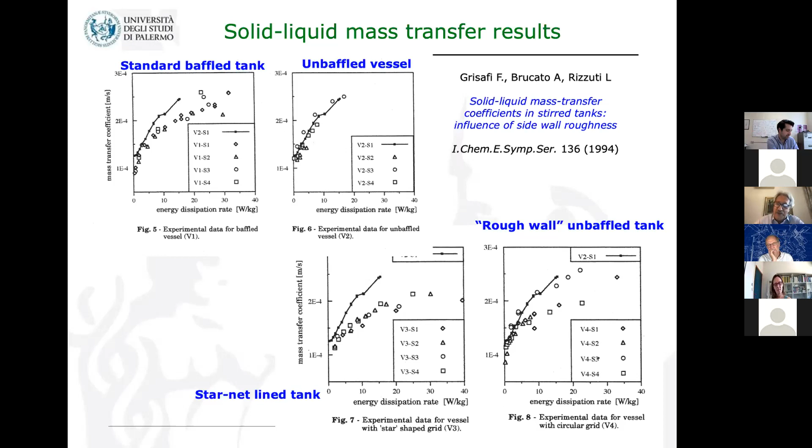At this point, we had come across a number of issues concerning unbaffled tanks and discovered that they were substantially unknown. Not even power demand could be decently estimated - there were few data, but not many. Particle suspension: zero info at the time. Mixing rates: nothing. Gas-liquid performance, etc.

So there were lots of unknown features of unbaffled vessels, and therefore our curiosity at this point was definitely at maximum. We knew that there were lots of unknowns, and in the last minutes of my presentation, we'll try to address some of the things we did over the years.

Let me just stress that it's not easy to get this fundamental research funded - it's very difficult to get funds for it. So this research went on from time to time, typically by stealing money from other research lines, other research projects, and whenever a student popped up who would volunteer to carry out some research in this field. So it took decades, really, just because we couldn't concentrate on it completely.

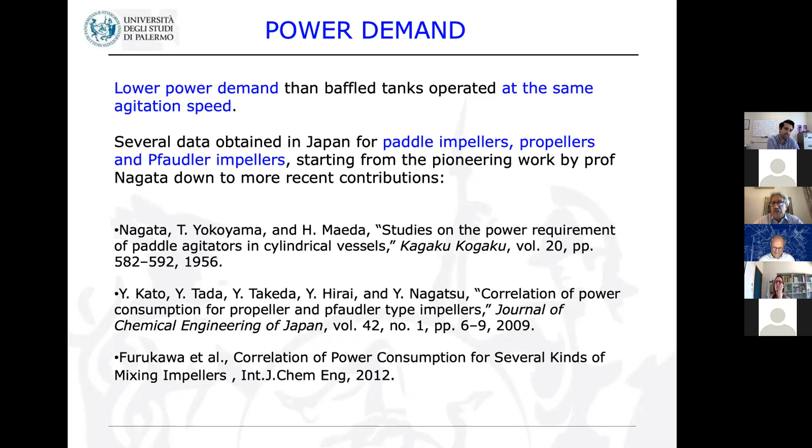What we did in this field was first identify and distinguish between the two main regimes that we chose to call subcritical and supercritical regime. Supercritical regime is when the deformation of the free surface reaches the impeller and air bubbles are steadily injected into the system - so it's a two-phase system really. While the subcritical regime is what occurs when the deformation has not reached the impeller yet. And of course you have a critical regime in between the two, which marks the transition between the two.

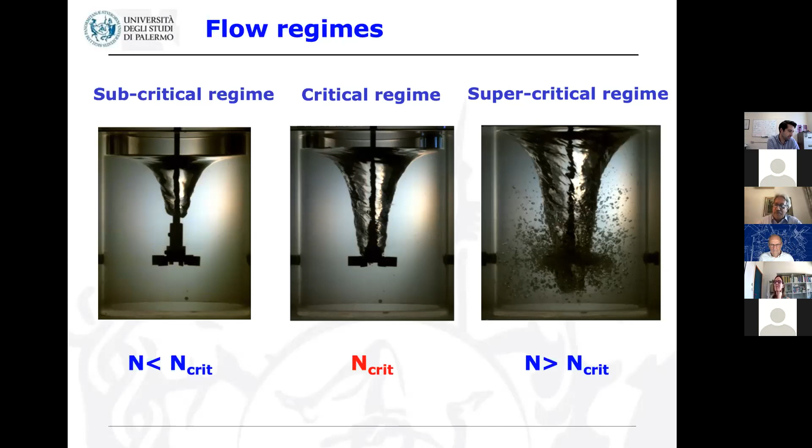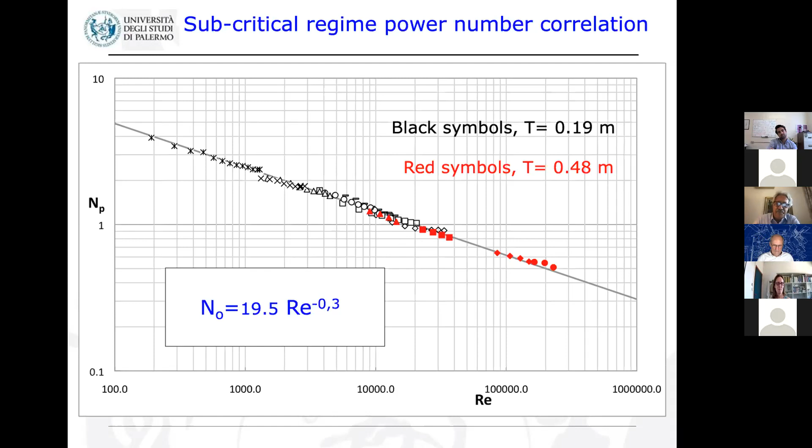So a very simple correlation turned out to be robust on scale up. The red data, taken on a larger vessel than the black data, line up remarkably well. As for supercritical conditions, luckily they also lined up very well and robustly on scale up with a simple correlation that involves, this time, not Reynolds number alone but the product of Reynolds times Froude number. These were the results, and they interpreted very well all of our figures.

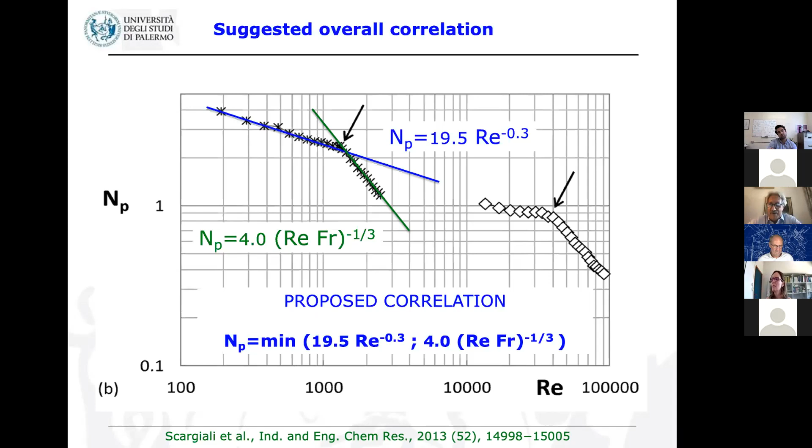We then proposed a complete correlation that says: at any Reynolds number, due to the behavior of the curves, you can compute the power number either by the subcritical correlation or the supercritical correlation, and all you have to do is take the smallest of the two figures. The correlation you select this way also tells you which regime to expect, so it lets you know whether you are in a subcritical or supercritical regime, and it works very well.

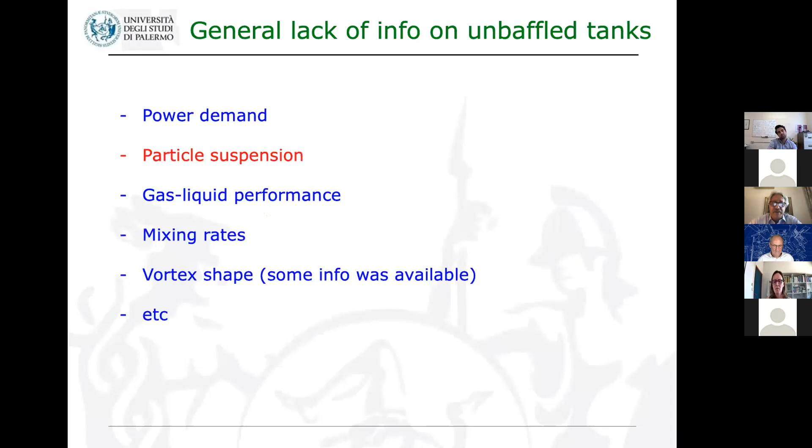So let's skip ahead. I won't say much about particle suspension; you probably know this better-known information we produced. Unbaffled tanks, in short, turned out to be much more efficient than baffled vessels, with specific power demand to reach the just-suspended condition being 5 times smaller than that required by the most efficient stirrers in baffled vessels, even when a simple Rushton turbine was used in the unbaffled vessel, which turned out to be a very efficient impeller for solid suspension in unbaffled vessels, probably the most efficient.

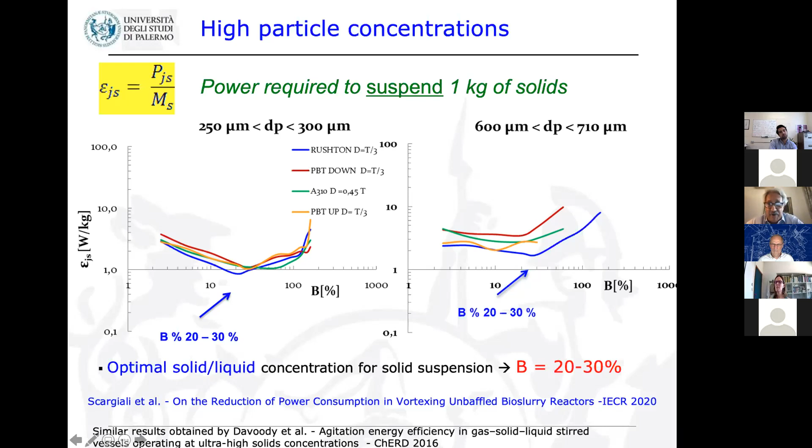I think I've almost run out of time, so I'll just give you some information about mixing times, which is the thing that worries most people when you say, why don't you use an unbaffled vessel? The first answer you get is about mixing times - you'd expect unbaffled vessels to be poorer mixers than baffled vessels, and they actually are.

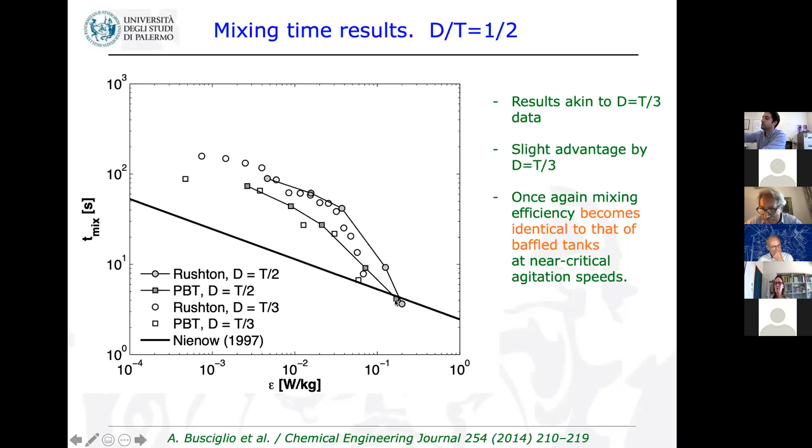But in this case, quite surprisingly, unbaffled vessels became as efficient as baffled tanks. This was quite surprising to us, and I hope it surprises you too.

If I have a couple of minutes more: mass transfer, gas-liquid mass transfer, was not an issue at the beginning, but then we considered that the large deformed surface typical of unbaffled vessels may well help oxygen to get in. And for weak cells, for shear-sensitive cultures, for which bubbles are a problem because when they burst they tend to damage the cells, we wondered whether using an unbaffled vessel, exploiting a relatively large interface surface with the gas over the liquid, you could get enough oxygen to sustain, for instance, mammalian cells.

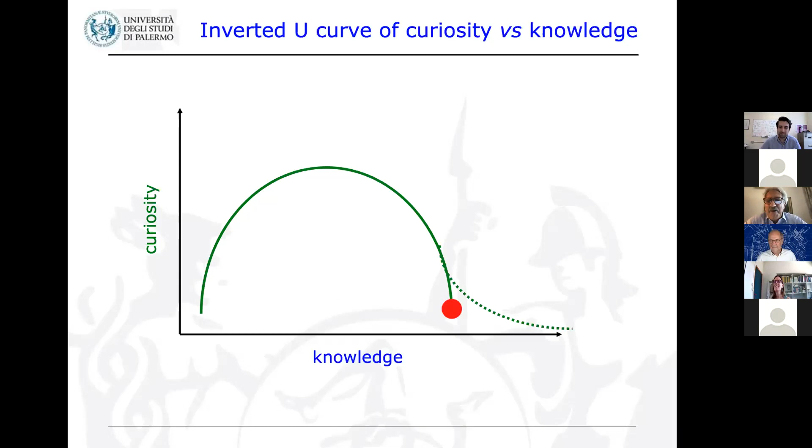I think I went over, so I won't steal your attention anymore. Let me just say that after having answered at least a significant part of the questions we had come across, we are now in this position on the curiosity versus knowledge curve for unbaffled vessels. I hope that at least my collaborators will still follow this path. In my case, I'm afraid I'm just going just there - I'm too old to still be very curious about this. I must do like Mario Livio did: start getting curious about possibly very different things I had not thought about earlier.